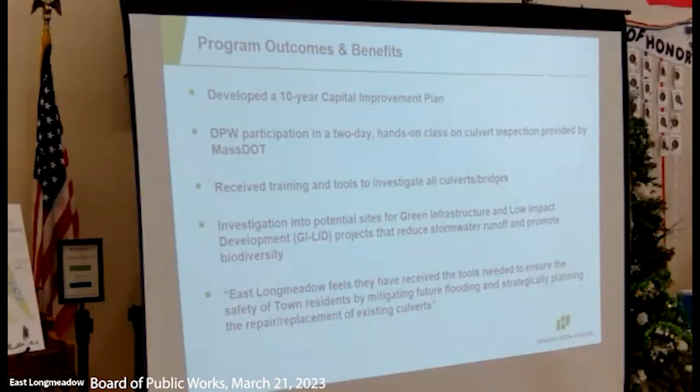We also received training and tools to investigate all culverts and bridges, and investigation into potential sites for green infrastructure and low impact development projects that reduce stormwater runoff and promote biodiversity. East Longmeadow feels they received the tools needed to ensure the safety of the town's residents by mitigating future flooding and strategically planning the repair or replacement of these existing structures and culverts.

Thank you, Bruce. So yeah, my name is Chris Lyman. I'm a staff civil engineer at Howard Stein Hudson. I was part of the field inspection team for the culverts located in East Longmeadow, so you might have seen me last year around inspecting culverts.

I was also part of the assessment and prioritization team for assessing and prioritizing these culverts, which I'm now going to go through in these next couple of slides, talking about how first we identified the culverts and then how we ended up prioritizing them for the town.

So at the start of this project, East Longmeadow really had us focus on two main priorities. The first priority was roadway accessibility. It's really important to note that with so many more severe storm events we're having, it's important that emergency personnel and DPW services can get where they're needed, especially during major flooding events.

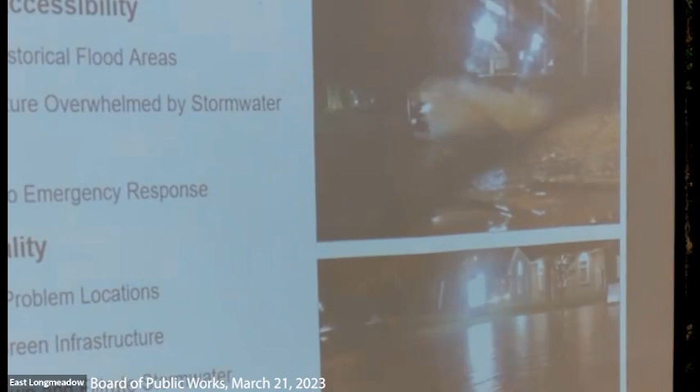You can see here on the top corner is the center of town, and the bottom one is Shaker Road. It's really important because these types of flooding events can cause road closures, meaning services aren't getting where they're needed. We worked with the town and were able to identify historical flooding areas within the town, and infrastructure might be overwhelmed by these occurring storm events.

The second priority we wanted to focus on with the town was water quality. Working with the town, we identified locations that could utilize green infrastructure and low impact developments, which can be used to slow down and filter stormwater runoff before it reaches streams, rivers, and other bodies of water.

Through a previous MVP study, 28 culvert locations throughout East Longmeadow were identified for further assessment. These 28 culvert locations were assessed and prioritized using four main criteria. The first criteria we used was structural condition. This was our field inspection - we were out in the field doing our inspections using this culvert assessment form you can see on the right.

Using this form, we were able to determine if culverts were in adequate, poor, or critical condition during our field inspections. An example of a culvert seen as being in poor condition can be seen in the top corner picture there, on Allen Street here in East Longmeadow.

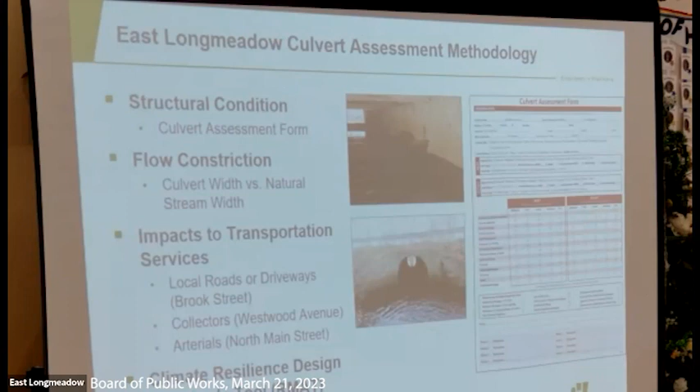The things we were looking for in these projects was how does the interior of the culvert look, how do the head walls of the culverts look, and even how the roadway over the top of the culvert looks. That can really be an identifier of how the structure itself is performing.

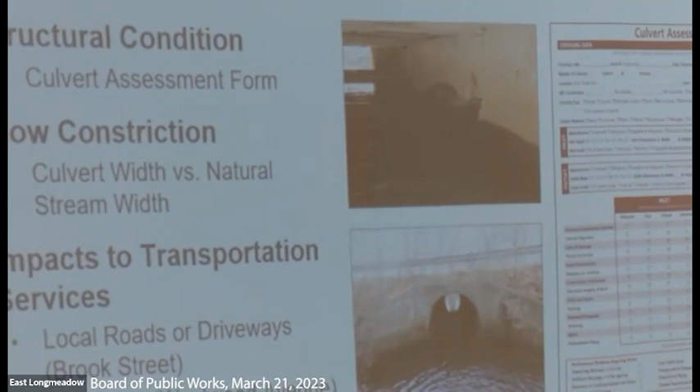The second criteria we used to prioritize these culverts was flow constriction. To do this, we looked at the existing width of the culvert and compared it to the existing natural stream width. If you look at the bottom picture here, this is a great example of a culvert that might be undersized. You can see how much narrower the culvert opening is compared to the actual stream width.

The third criteria we used to prioritize these culverts was the impact it had on transportation. We looked at all 28 culverts and assessed what type of roadway they're located on.

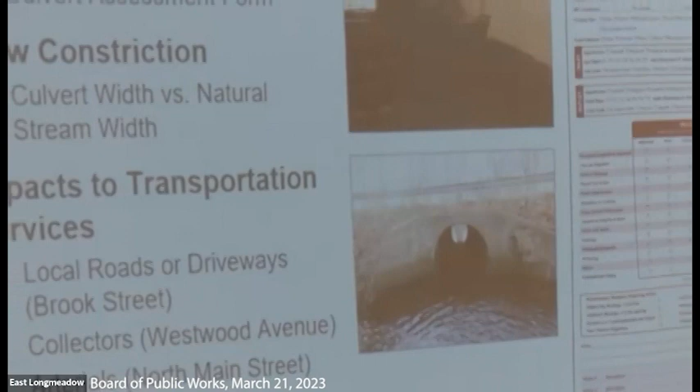You can think of a collector like Westwood Avenue. It's one of those roads used to get out of a residential area and onto a main street. Culverts located on that might be higher prioritized because they affect more people in the town than culverts located on local roads.

But the last major thing we really looked at was culverts located on arterials, like North Main Street or Somers Road. Things used to get in and out of town, and things that are going to be used by emergency services to travel around town.

So you can imagine if a culvert goes out on North Main Street, it might split the town from one side to the other, causing emergency services to have to detour around to get to certain locations they want to reach.

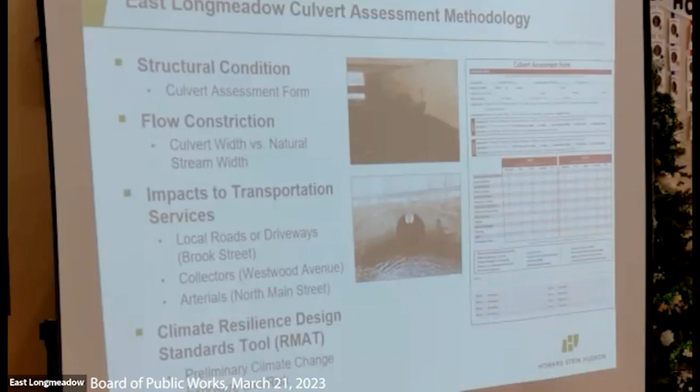The last criteria we used was the Climate Resilience Design Standards Tool. This tool is used to determine preliminary climate change exposures and risks at each culvert location. It looks at criteria such as sea level rise, extreme precipitation, and areas that have extreme heat.

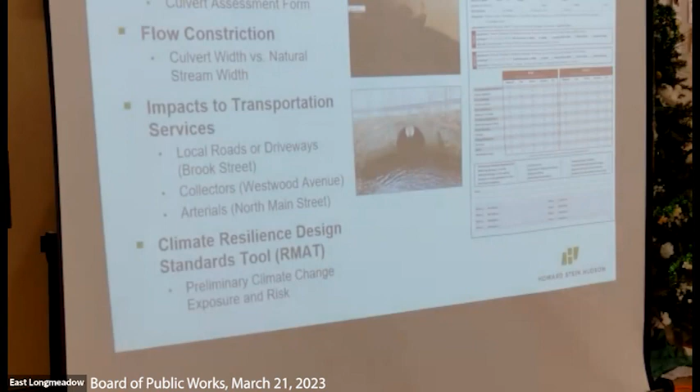We really wanted to look at this. Again, this is a preliminary tool we used, but it helps locate areas that might have, especially in the town of East Longmeadow, high precipitation areas and high heat risk.

From these four criteria, we came up with a priority score, determined by adding up the culvert's roadway score. Culverts located on more local roads got a rating of 5, but culverts located on something like Allen Street or North Main Street got a rating of 3, meaning they're higher priority.

It's also important to note that the lower the score, the higher the priority. So you can see on the right here, the priority score goes in ascending order — the lower the priority score, the higher we saw the culvert was a priority.

We also looked at the structural condition score, which was when certain elements of the culvert were viewed as being either adequate or critical. Depending on the number of attributes marked as adequate, they got a certain amount of score for each attribute, and that's how we came up with our structural condition score.

Then we looked at our flow constriction score — whether the culvert was sized properly. If the culvert's not sized properly, it can cause upstream flooding because not enough water is able to pass through during high stream events, but it can also cause culvert overtopping, where the road can potentially get washed out completely.

The flow constriction score was 1 to 5, with 1 being where the culvert was assessed to be about a fourth of the size it should be, while a culvert that was around three-quarters of the proper size might get a 3. That's how we used our flow constriction score to determine which culvert was undersized.

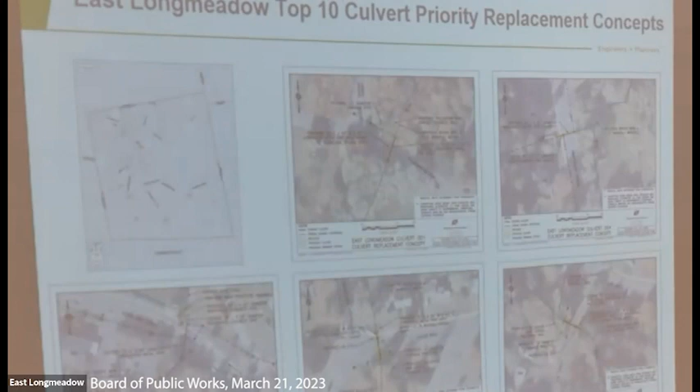Also, if you want to make public comments on these specific concepts, you can either make them here in person, or you can make them online on the project website. Here you can see our other 5 priority concept culverts.

I'm going to hand over to Bruce to go over a couple of these concepts in person, so the town can describe what their priorities were at these locations, and then what we propose to do at these locations.

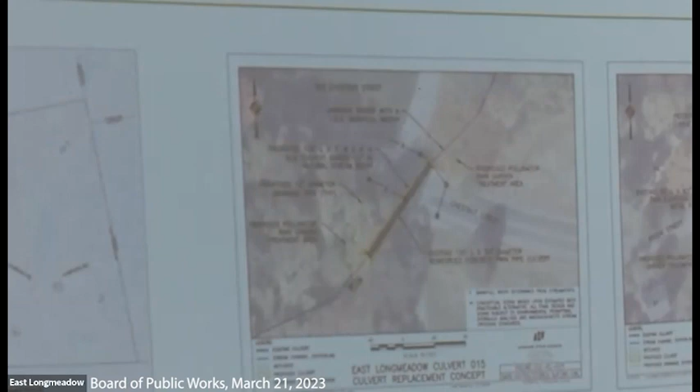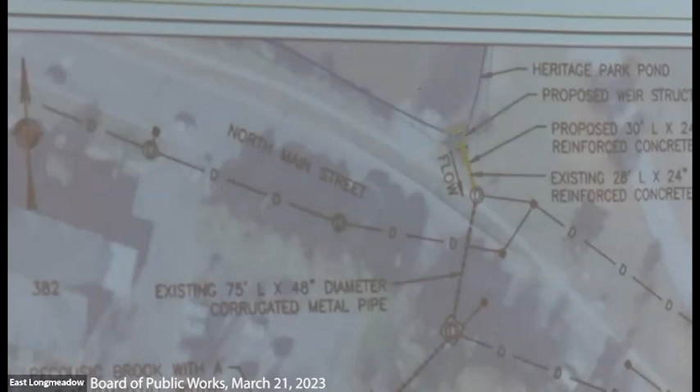Next one that we think, as the Department of Public Works, is one of the highest priorities is the Heritage Park culvert. The precipitation sheet flows from this elevated northeast section of the parking lot of the 65-acre property and feeds indirectly into the pond. During heavy rainfall, there is no way for the town to control the 24-inch reinforced concrete pipe for increased flows. The Department of Public Works recommends reconstruction of the head wall, increasing the reinforced concrete pipe to 30 feet, and installing a new weir to control flows in the height of the pond.

Heritage Park is one of the most visible areas when it comes to flooding, given the proximity of one of the most traveled roads in town.

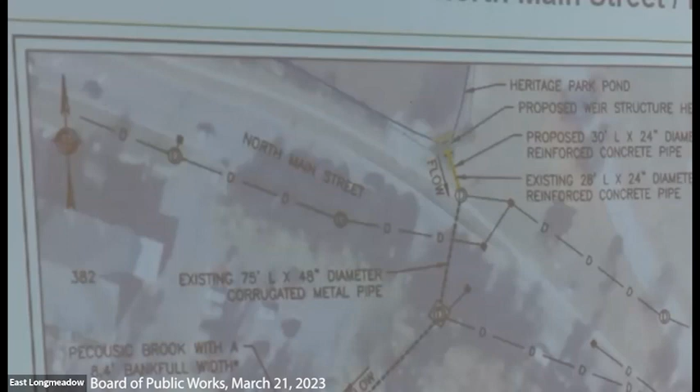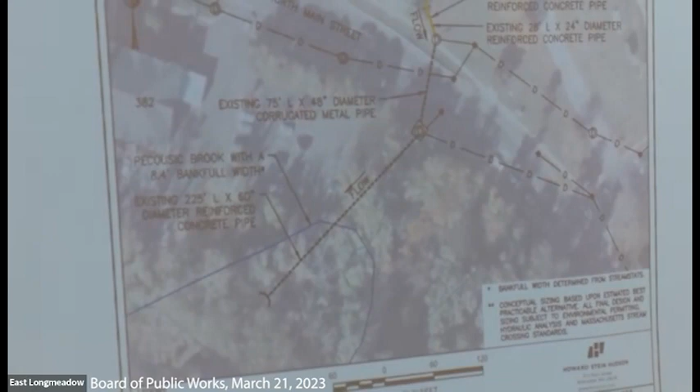The Department of Public Works, from what we have discovered at that location, has applied for a grant for rehabilitation of this culvert and all related piping based on our investigation as part of this MVP grant activities.

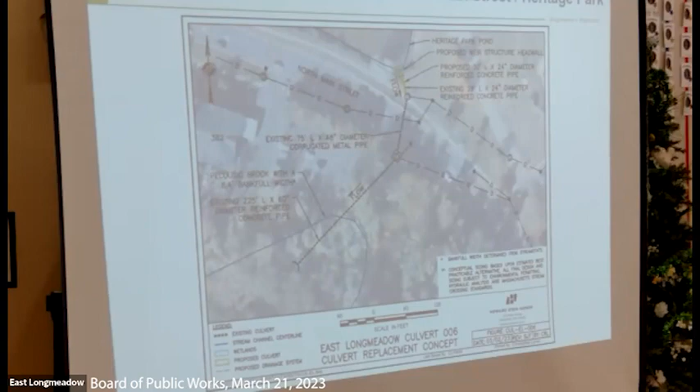So again, thanks, Bruce. This is the first location Bruce was talking about, here at Heritage Park on North Main Street. Bruce said the main priority of the town is they really wanted to focus on being able to control the level of Heritage Pond.

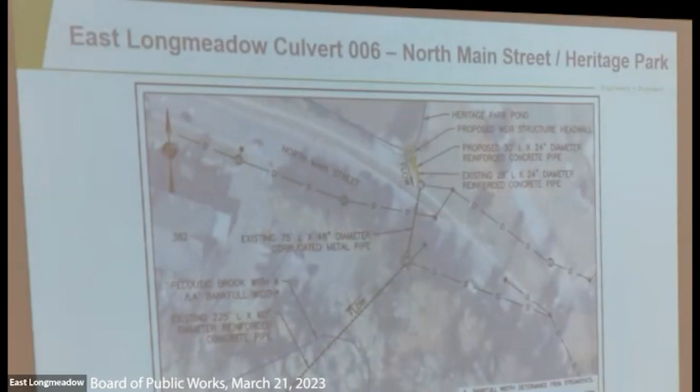So what we're proposing here is a weir structure head wall that will allow the town to set the elevation of the pond. So whenever the elevation of the pond gets over that certain elevation that we see as adequate, it'll spill out over and into the new proposed 30-foot long by 24-inch diameter reinforced concrete pipe.

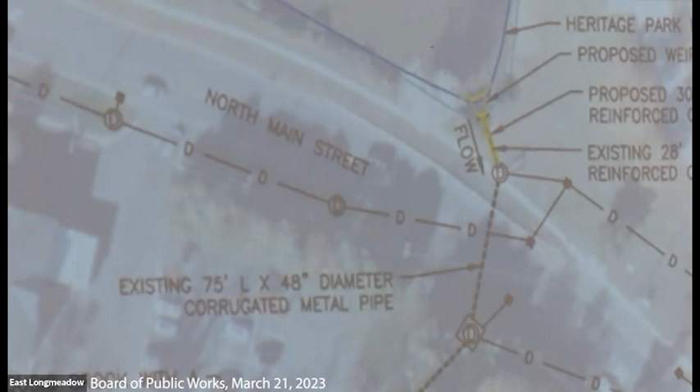At this time, we just went with a 24-inch diameter pipe because this is just in the concept stages. When these actually go to design stages, they'll go through the Massachusetts stream crossing standards, which really look at the proper size this pipe needs to be based on amount of inflow, because this structure also gets flow from all the closed stormwater drainage from this part of town.

This is the other location that Bruce talked about. This is Speight Arden. What we're proposing here is a 55-foot long by 9-foot wide by 4-foot high box culvert buried 12 inches in the natural stream bed.

We're doing this because it seems that some of the erosion on the head wall was actually caused by it being a 3-barrel culvert. When you're getting high stream flows, it's really those parts of the head wall that are separating the pipes that really get a lot of the brunt of the force, and it can cause some erosion.

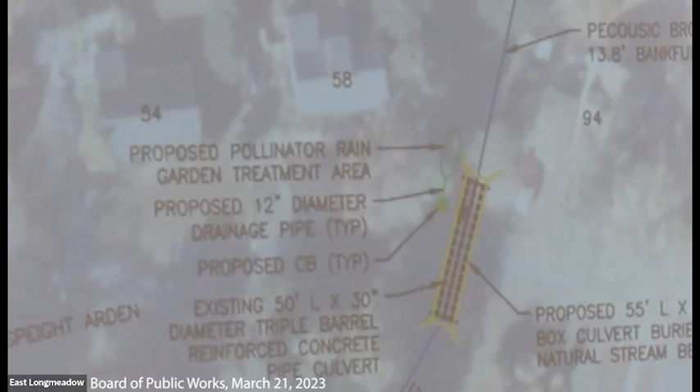So having a singular structure like a box culvert will allow for stream flow to pass right through the culvert without having those restrictions. It was also important this was a good location because of the sewer pipe that the town talked about replacing. It met a high priority that if the town was going to replace their sewer pipe, it was a good location to also replace the culvert at the same time.

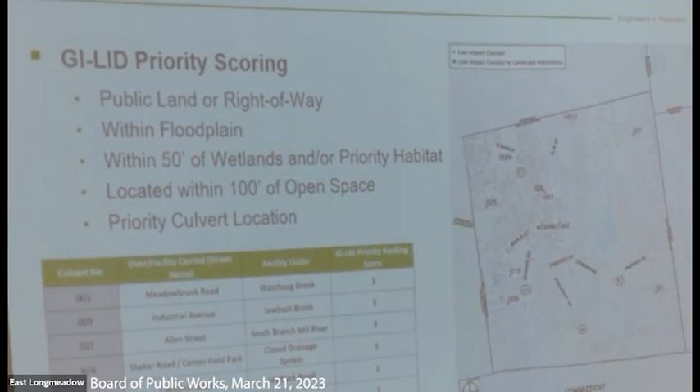Besides priority culvert locations, Howard Stein Hudson and the town assessed culvert locations for green infrastructure in low impact developments. The 28 culvert locations were assessed and prioritized for green infrastructure and low impact development using 5 main criteria.

The first criteria we looked at was whether the culvert or area was located within public land or right of way. The second was whether the culvert was located within a floodplain. Then we also looked at whether it was within 50 feet of a wetlands or rare priority habitat, whether it was located within 100 feet of open space, or if it was already considered a priority culvert location.

The reason why we looked at areas that were already priority culvert locations is because we really wanted to show how low impact designs and actual structures can work hand in hand with dealing with climate change and flooding problems.

So the 2 main criteria that we looked for concepts here in the town of East Longmeadow was vegetated water quality bioswales.

Bioswales are best suited for roadways that do not have existing curb or drainage systems. The bioswales collect water as it runs off the side of the road, treat the water, and redirect the roadway runoff to the nearest stream, body of water, or a closed drainage system.

The second typical concept we looked for the town of East Longmeadow was rain gardens or wet garden treatment areas. These treatment areas tend to be best suited for roadways that have existing curb or drainage systems because they can be used to filter existing drainage systems as they outlet into existing streams and water bodies.

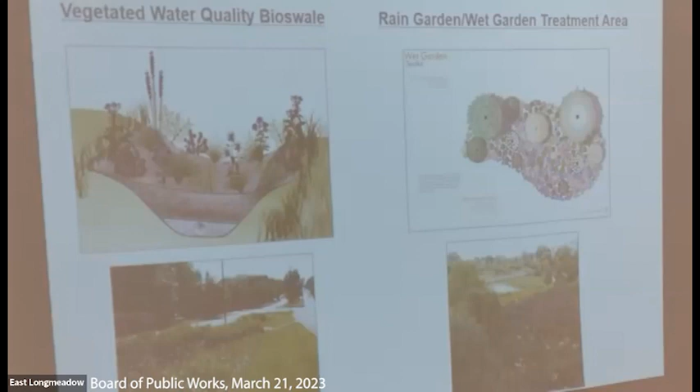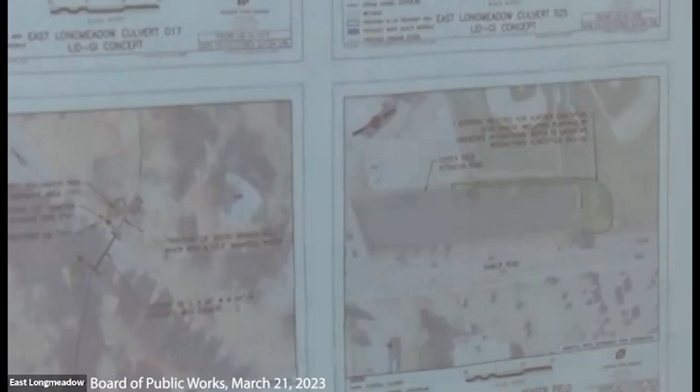Here are the other top 5 green infrastructure and low impact development locations. At the bottom right is Centerfield Park. This location was not a culvert location, but it was prioritized by the town as a good example to the community of how green infrastructure and low impact developments can be used in other places in the town. Now I'll pass it over to Bruce to talk about that type of priority for green infrastructure.

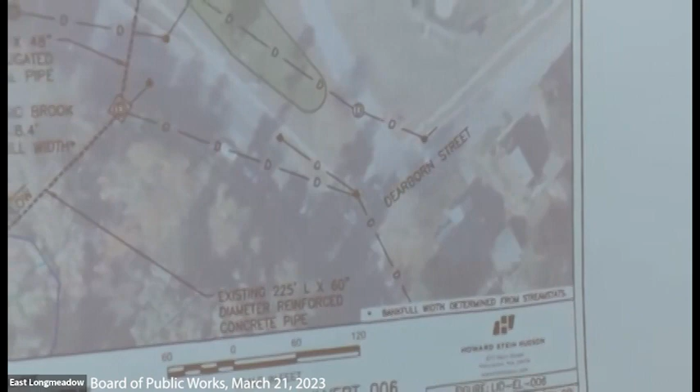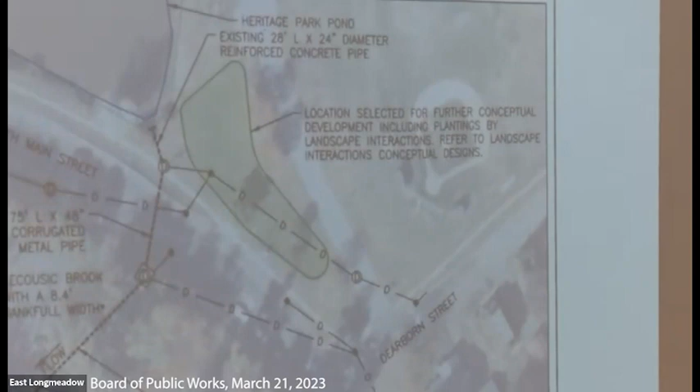Thank you, Chris. So for the Heritage Park area, the LIDs we're recommending at that facility include opportunities to increase water holding capacity of the grassy area adjacent to the pond, create a designed wetland area that improves aesthetics and provides public access as well as flood management, integrate gathering spaces and pedestrian traffic from the sidewalk into the Basin Park and beyond, remove invasive and non-native species from along the pond edge, and improve habitat for pollinators and wildlife.

And on the Centerfield portion, we have some opportunities there as well. This isn't part of culvert inspections or anything like that, but as Chris said, it's a low impact development which will assist the area at the center of town. Opportunities include expanding the basin footprint to increase water holding capacity and prevent flooding of the field and roadway, and dredging and deepening the basin to further expand water holding capacity.

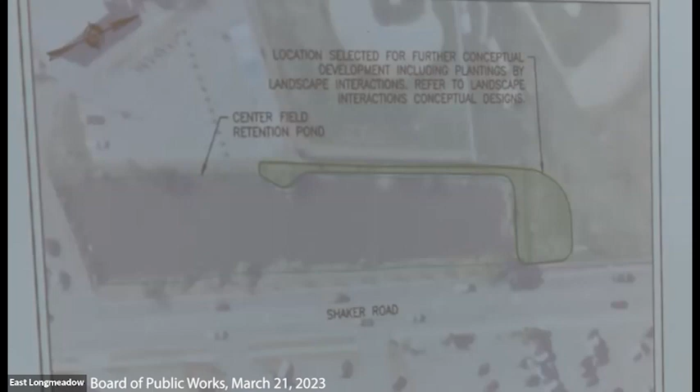Create a naturalized edge to the basin to support a much wider range of plant and wildlife species, improve aesthetics, and create pedestrian access to design basin features from crosswalks to the field. Keep existing ornamental trees, remove invasive species, and create an edge habitat.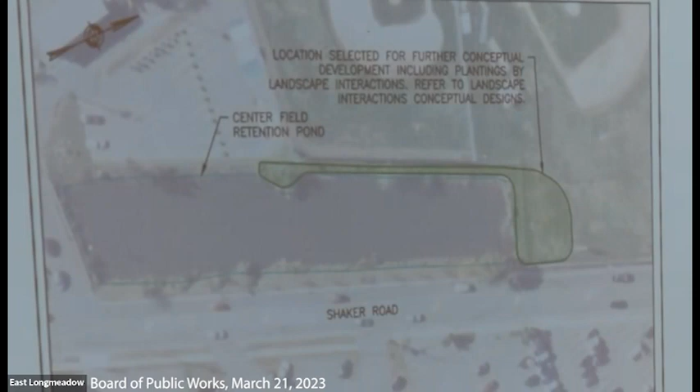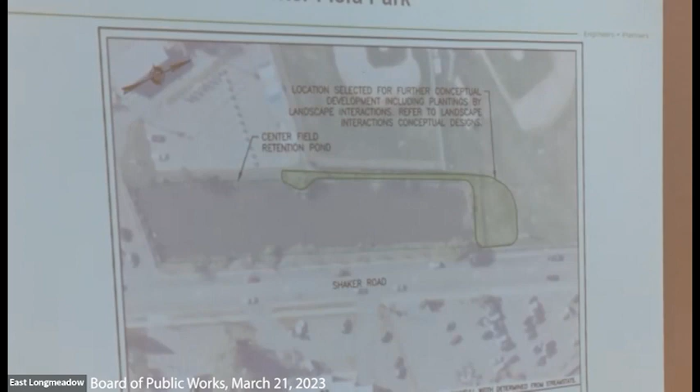So as I said before, these locations were selected by the town to have further concepts done by Landscape Interactions. I'll pass it over to Casey now from Landscape Interactions to go over these concepts. Thanks, Chris.

Our role as Landscape Interactions was to design these low impact stormwater management solutions for Heritage Park, on the right, and for Centerfield, on the left. Apologies, the text is a bit small, but you can go up to the board later and check it out. Basically, we have an abbreviated plant list at the bottom, and the various pollinator species supported at the top. I'll go into detail on those in a bit.

But in both sites, we propose using naturalistic design elements to, as we said before, slow down the flow of water, increase soil infiltration, and improve water quality, all to address the local flooding issues during storm events at both sites.

The backbone of our work as a company is in expanding plant biodiversity and introducing a wider range of native plant species to both sites. The root systems of native plants do a better job of stabilizing soils and filtering runoff than typical non-native turf grasses, and they provide invaluable habitat for pollinators and other wildlife.

As with all of our work, we created locally specific plant lists tailored to expanding habitat for native bees and butterflies. These are species specifically at risk of extinction in the East Longmeadow area, so this is a very specific plant selection. All of the plants we suggest serve as pollen, nectar, or host plants for one or more of the pollinators listed.

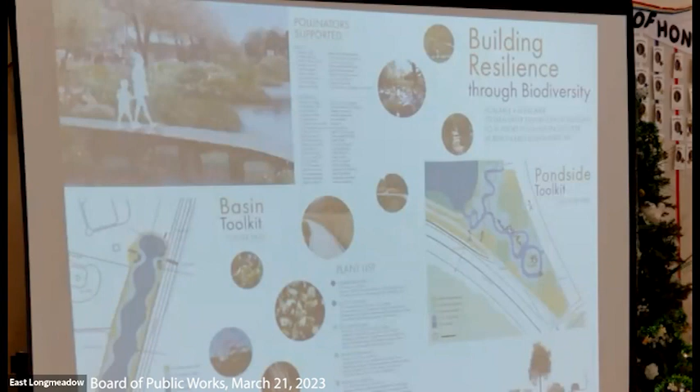At Centerfield, on the left, we propose a few different planting zones based primarily on soil moisture and topography. The primary goal of this design is to expand the basin footprint, conceptually by about 4,800 square feet, to increase the water holding capacity in addition to any dredging and deepening of the basin we can do. The new basin edge will be north of the crosswalk.

So there is an opportunity to create a more interesting visitor experience entering the park through this footbridge. You can kind of get the sense of it at the top left, in that rendering.

Where there's currently these rip-rapped edges in this very rectilinear, almost like a swimming pool basin, we propose a naturalized undulating basin edge to provide more planting area while maintaining capacity, and also to improve aesthetics. Having more real estate for native vegetation will not only increase wildlife habitat, but will also increase the opportunity for infiltration and to hold more runoff from the roads, treating the water before it exits under Shaker Road on the right.

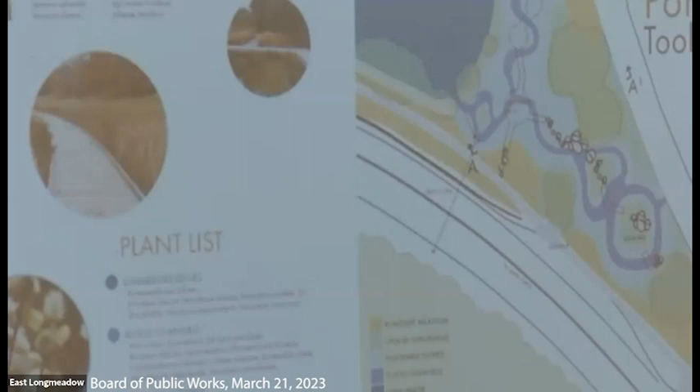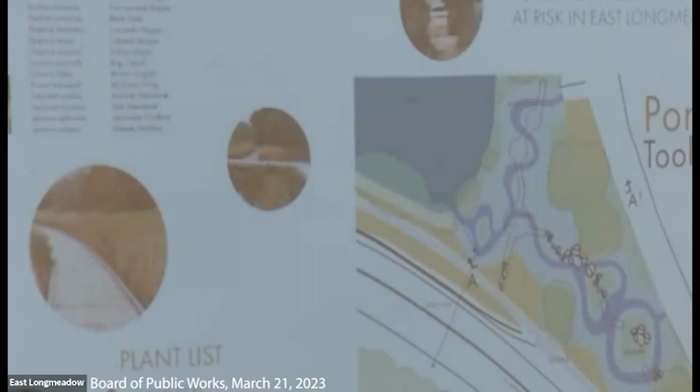Going over to Heritage Park on the right side, we propose creating a naturalistic basin design with meandering channels, as you can see in purple, slopes and berms. It's designed to receive runoff from the parking lot and driveway where there are currently naturally occurring eroded channels, and it will also receive overflow from the pond. This basin will be aesthetically beautiful and full of wildlife and plant diversity, with a great opportunity to bring recreational features such as boardwalks, gathering spaces, and observation decks into the basin.

Across both sites, we designed for five zones with distinct plant communities - that's what the different colors mean in these conceptual designs. Each color is a different assemblage of plants. The first, submerged edge habitat, is full of plants able to sustain permanently wet roots.

The second is the floodable slope zone, shown in light blue - hard to see here - which will be the zone that floods and can manage being dry during a drought, but the plants there won't mind getting wet feet from time to time. Then there's an upland zone for the berms and islands in light green, with shrubs, wildflowers, and drought-resistant grasses. The yellow zones are alongside the roads, which will have specifically salt-tolerant plants.

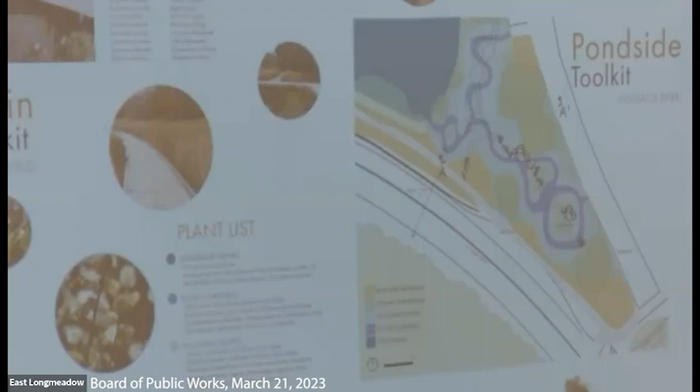Theoretically, these plant communities can be applied to any similar areas throughout East Longmeadow, which is important to all of our work because of the scalability and replicability of these designs - it will allow anyone in East Longmeadow to take the plant lists and apply them to their own spaces.

All of these plans will be made publicly available through pamphlets we'll be making for the town later this spring, and they'll also be posted on our website. For now, you can see the current stage of the design on the board up front. That's all for me.

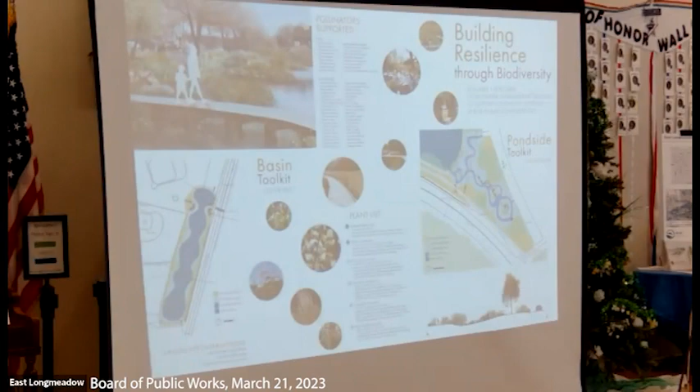Thank you, Casey. So as Casey said, all of these concepts, including landscape interactions, our culvert concepts, and our other low impact and green infrastructure concepts are available here in person to view on the boards up in the front.